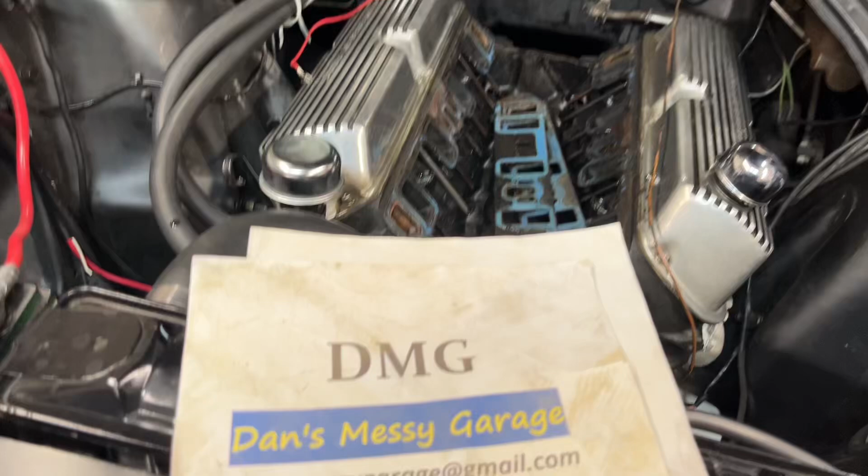This is day 2 of working on the 63 Falcon Sprint project.

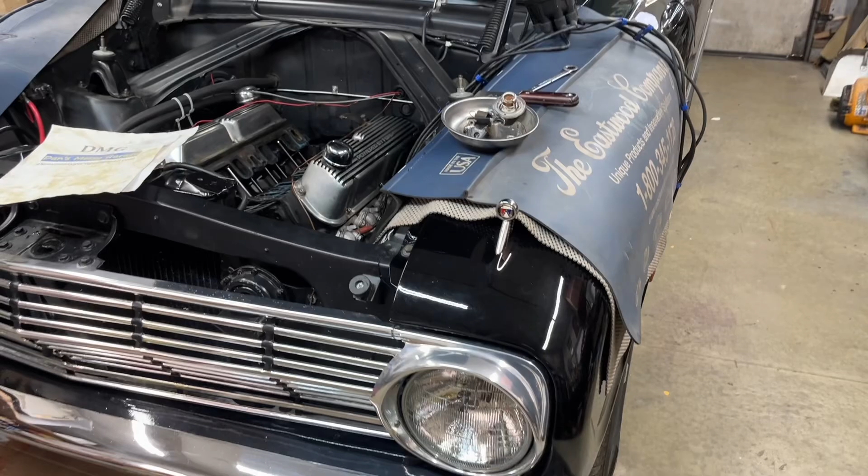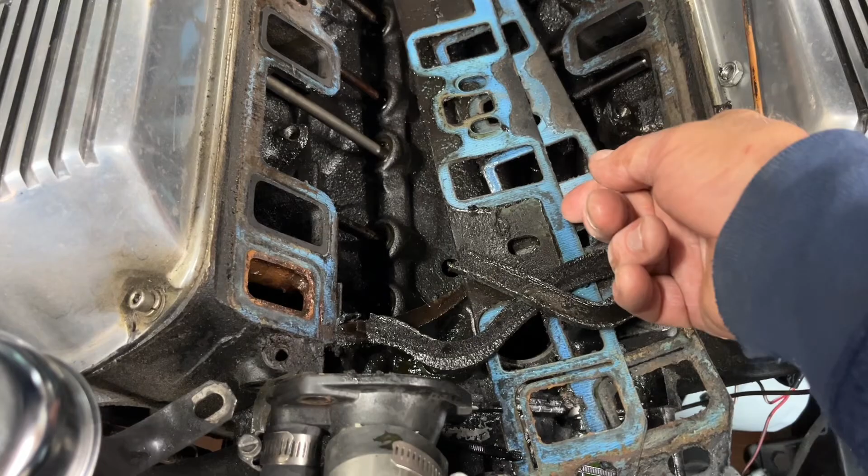To my surprise, the intake gaskets peeled right off. Normally you have to scrape and scrape on those.

And even the little cork China wall gaskets popped right off. I mean, they're petrified, but they came right off, so that's a big plus.

And the engine is in good shape inside. I don't know the history of it, and the owner doesn't know the history either because he's only had the car about 1.5 years or so.

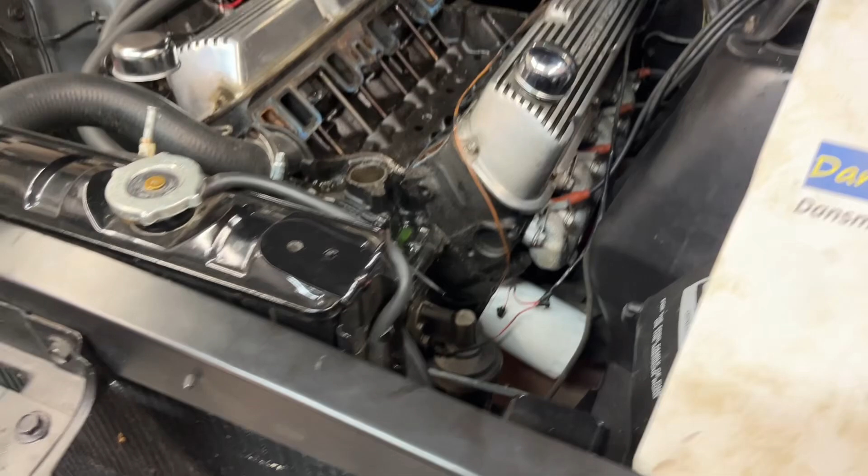And it's not full of scum. It's clean, looks good. So this should take minimal cleanup with the gasket on.

I don't use the cork gaskets on it. These are called China walls, here and that wall back there.

I use, like most people, a bead of RTV on there. Seals better, easier, lasts longer. And I gotta stop yakking and start working.

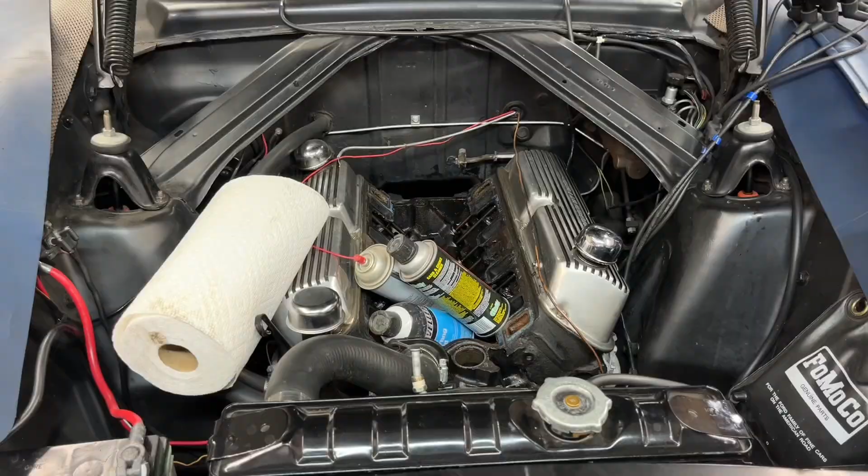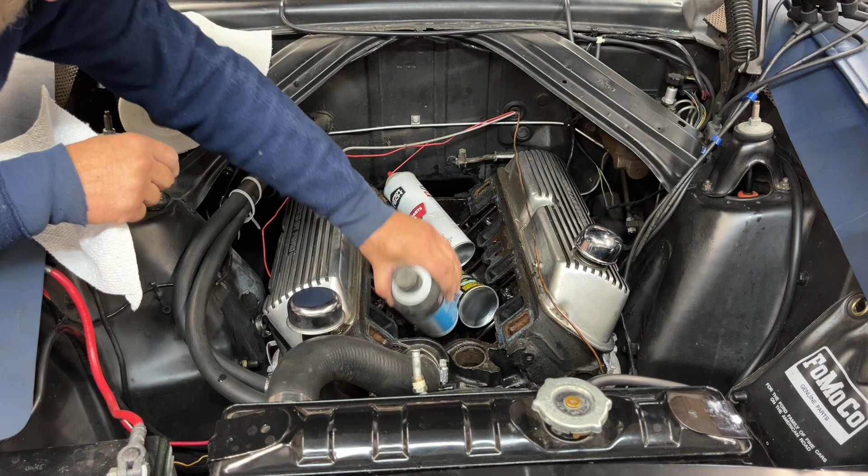I have carburetor cleaner, brake cleaner, and starting fluid. I'm going to see which one works best on the gunk that's on the gasket surface here. Maybe a combination of all of them, who knows?

Alright, here we go. That seems to be working fair, that's brake cleaner. Chunk of paper towel. I'll try carburetor cleaner next.

That might work even better. I'd say yes, that works better so far. Okay, that's carburetor cleaner.

And starting fluid. It's my favorite go-to cleaner because it doesn't take paint off or attack plastics. It just does a wonderful job of cleaning grease and oil.

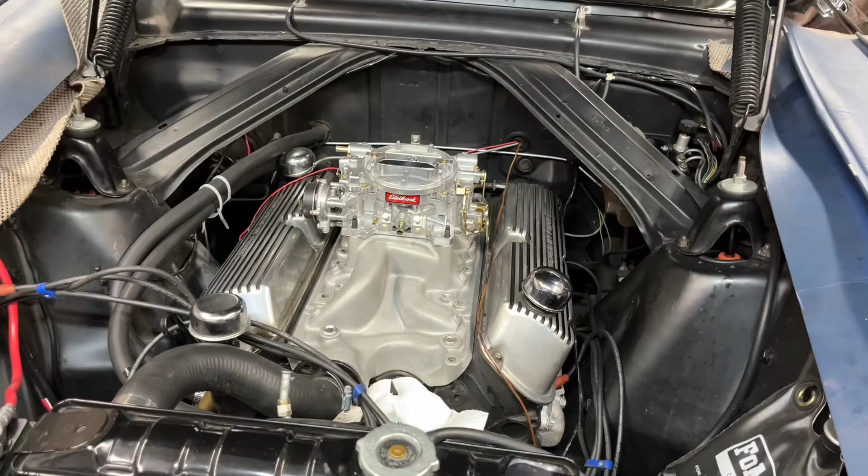I just dropped the intake on there with no gaskets, no bolts, just for testing purposes. The carburetor is just slid on, not bolted, no gaskets.

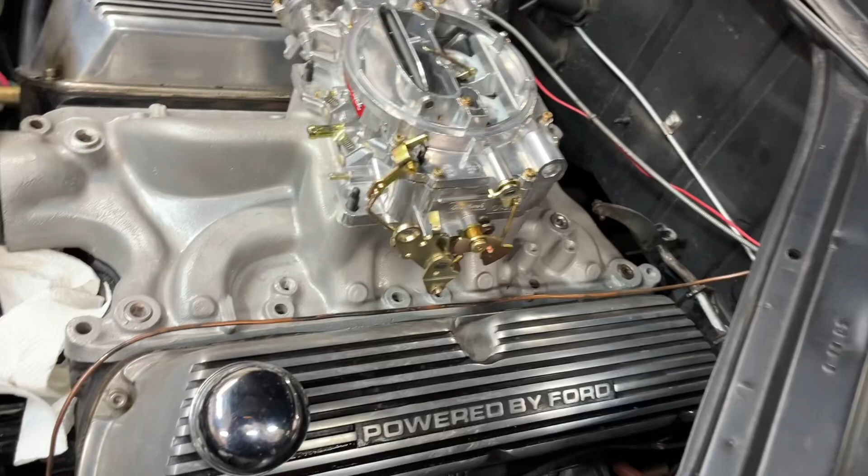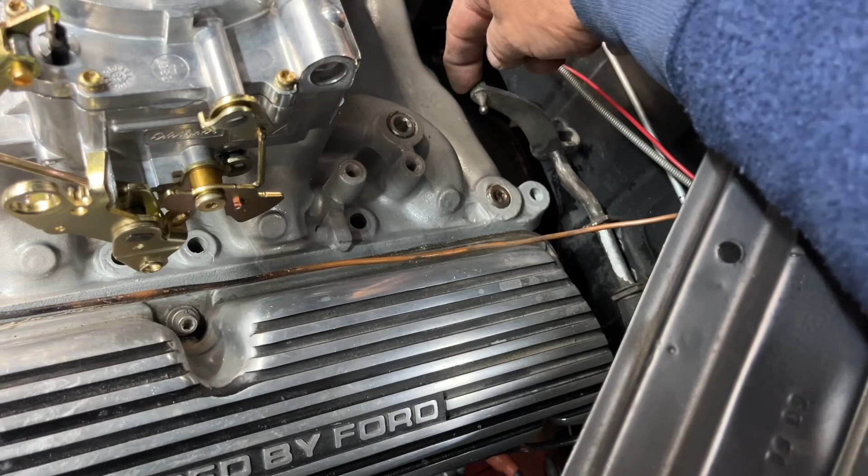No gaskets are harmed in the making of this video. Anyways, looking at the dilemma with the throttle, this little lever here is all there is hooked in the car, and that's not going to work.

This carburetor linkage, I'm going to do this one-handed here. The bottom portion, down where my thumb is, that moves approximately 1.5 inches, maybe 1 5/8 inches in that direction.

This lever, that would be idle, that would be full throttle. So this lever is pulling back for throttle.

Now I'm going to have to take that off there, cut that, and weld it so it's sticking up on a better angle.

I need to rethink this though, because if I'm going to cut that off, I'm probably going to make a different lever coming up over here.

So I could just run a rod from one of these holes back to that lever, so it's more in line and works better.

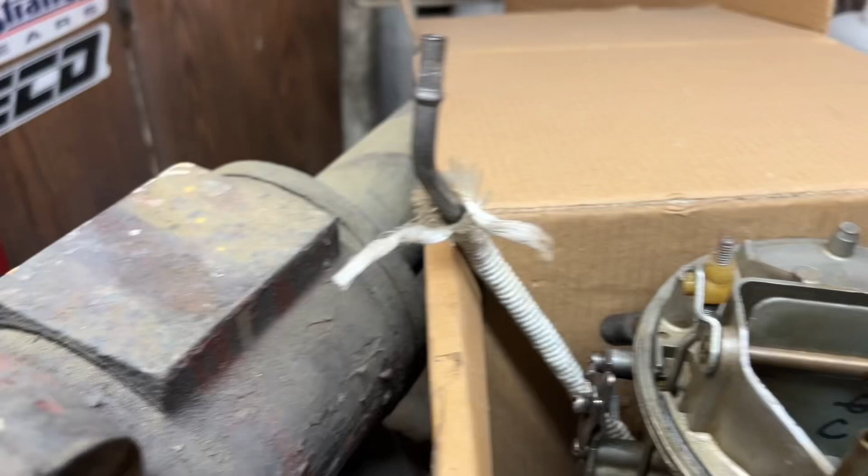Because I took this big contraption thing out of there, let me move the old carburetor.

They had this bell crank affair sitting on there, and it didn't work right.

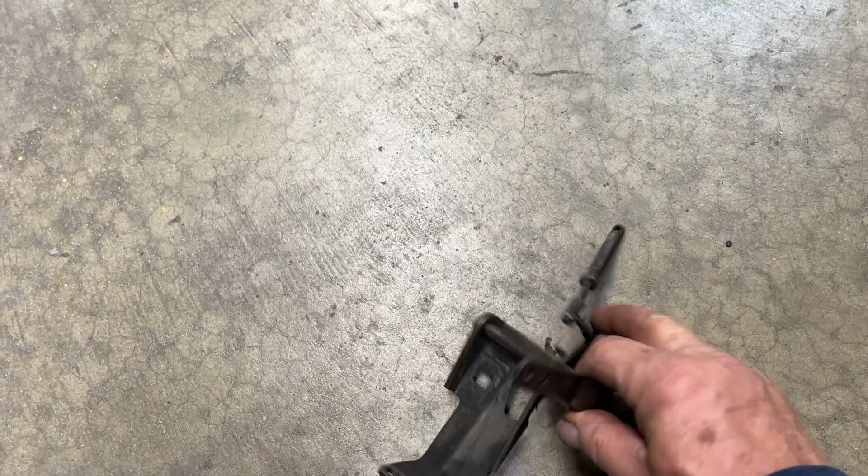I mean, it was sloppy. You pushed the pedal a lot, and this would move before it would do anything with the carburetor. And it just had a crappy feel.

Plus, the bolt where it bolts to the intake, those two holes are on an angle, and on the intake in the car, it's like that.

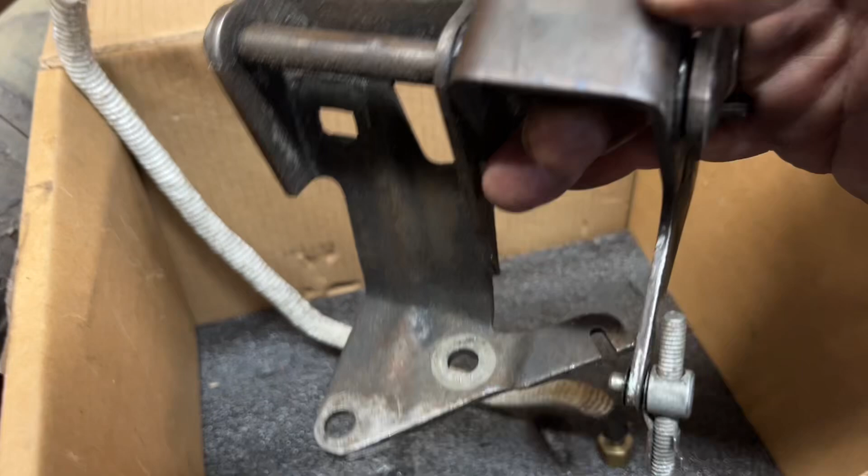But I want to do away with this whole mechanism. That might be worth something to somebody, but it's really not worth much for this project.

I have a bunch of scrap metal, and I've done stuff like this before, so I can come up with a viable solution. I have to ponder this for a few minutes, and then I'll bring you back and let you know what I decided.

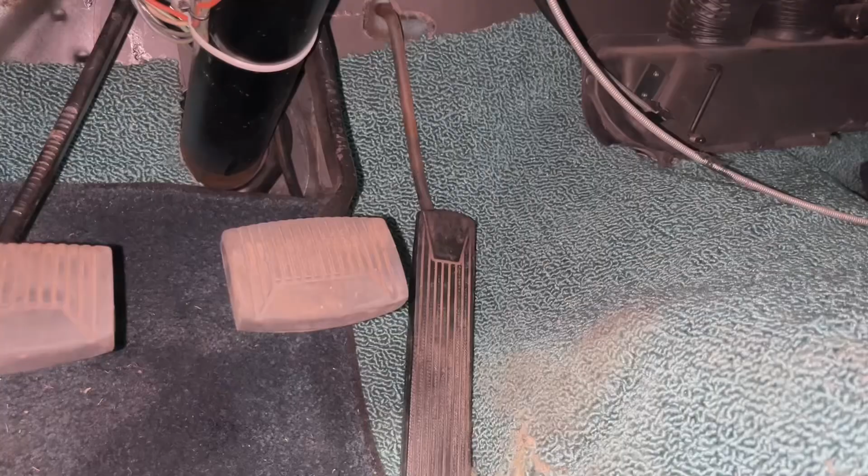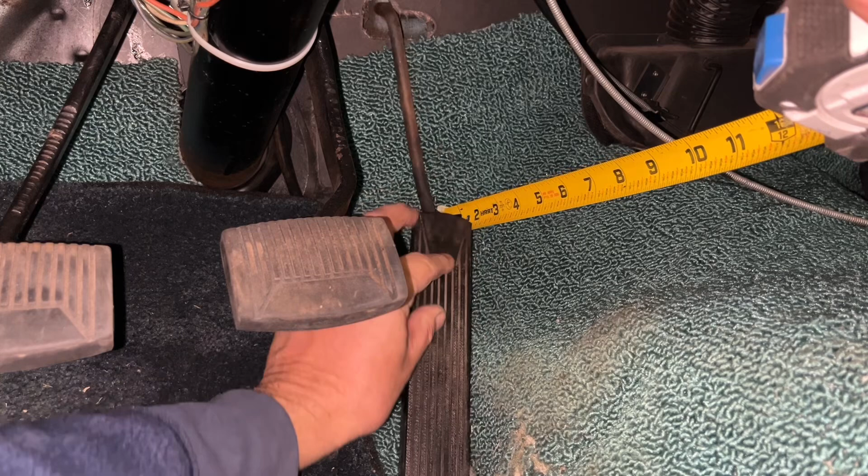Trying to get the camera positioned where I can show you this. In the Falcon, the gas pedal from the factory feels like it has about 3 to 3.5 inches from idle to full throttle.

The pedal pivots on the floor under here somewhere, comes up through the carpet.

It's bolted to the floor under the carpet, and the top of it pushes on an arm, and that arm...

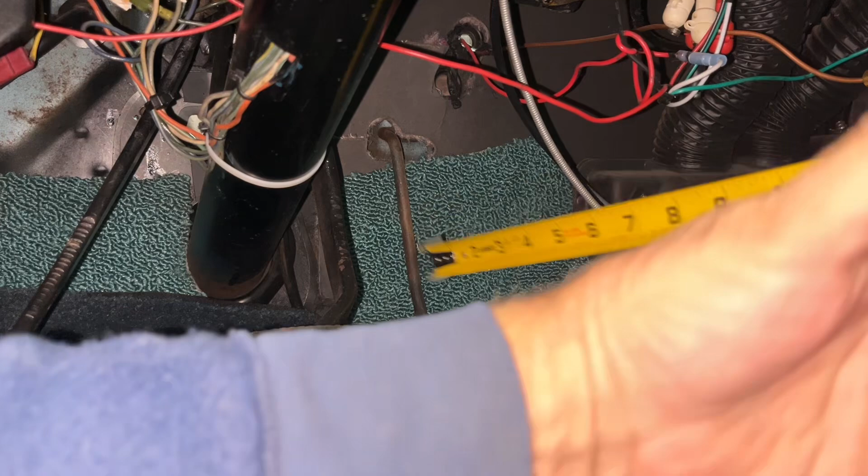is about 8 inches long where it pivots in the firewall. So we've got like 3 or 3.5 inches of travel here on an 8-inch long rod sticking through the firewall.

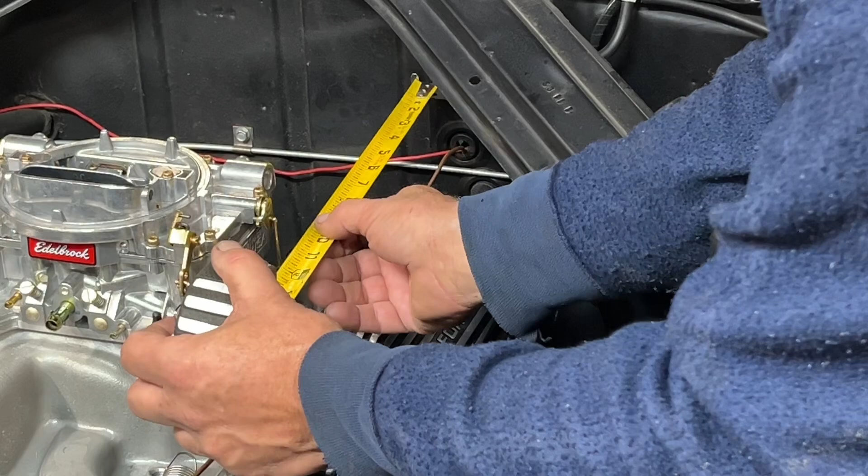Okay, now I'm under the hood. The carb's at idle, choke is off. If I measure from the firewall to this location where this little arm would hook to the carburetor, I get roughly...

13 inches. Now there's another location higher, this big hole. I could use the center of that if I had to get more throw. That is, let's say, 13.5.

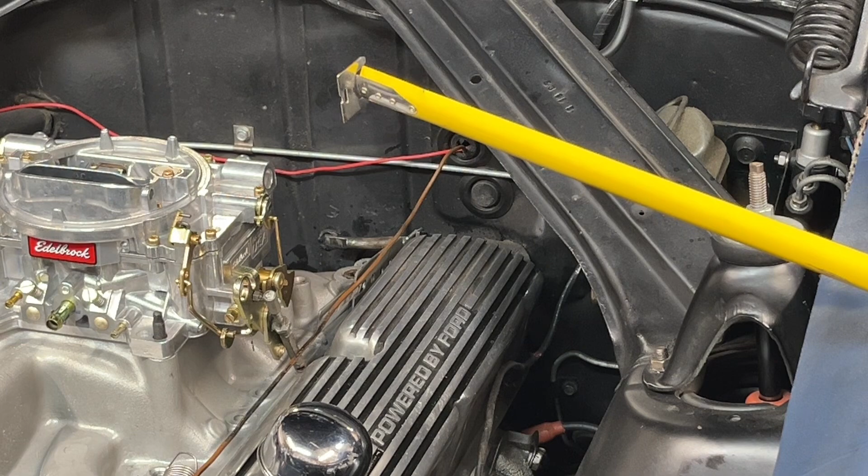I'm gonna write that down. So we got 13 and 13.5.

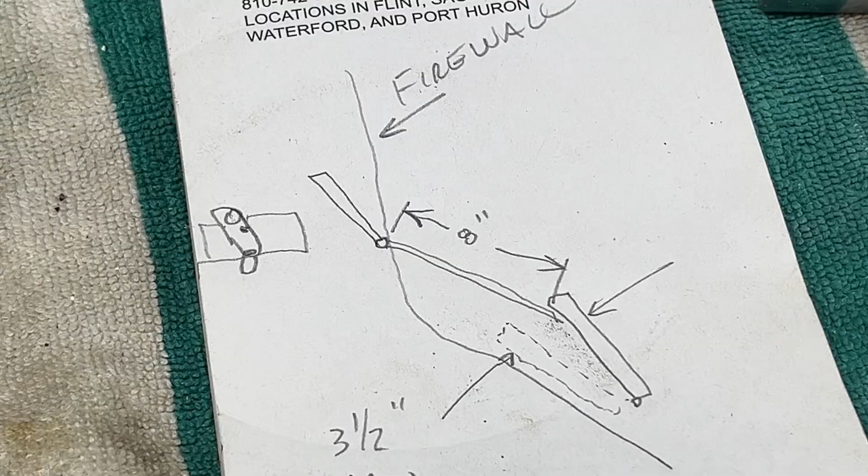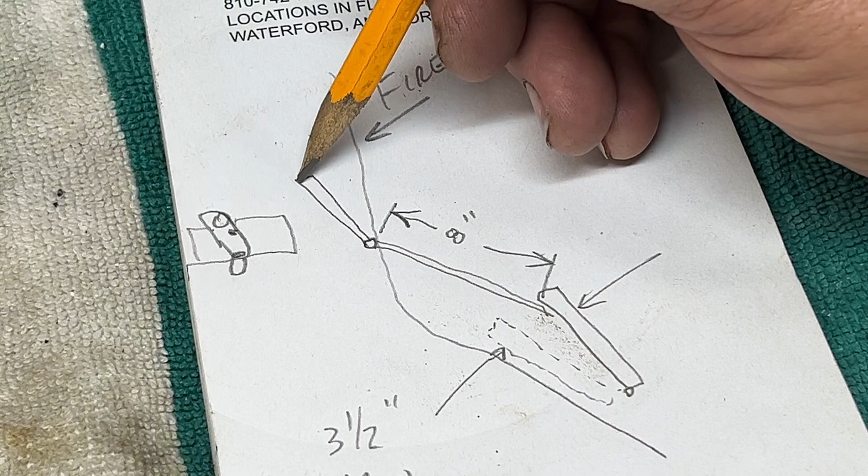Now when you take an 8-inch long lever, let me see if I can illustrate this on paper. All right, this is the firewall, this is the gas pedal, and it has about 3.5 inches of travel in that direction. The lever that it pushes on is 8 inches long, and if that moves 3.5 inches, and if this were 8 inches out here, then to get this to 3.5 inches here, this would move 3.5 inches out here.

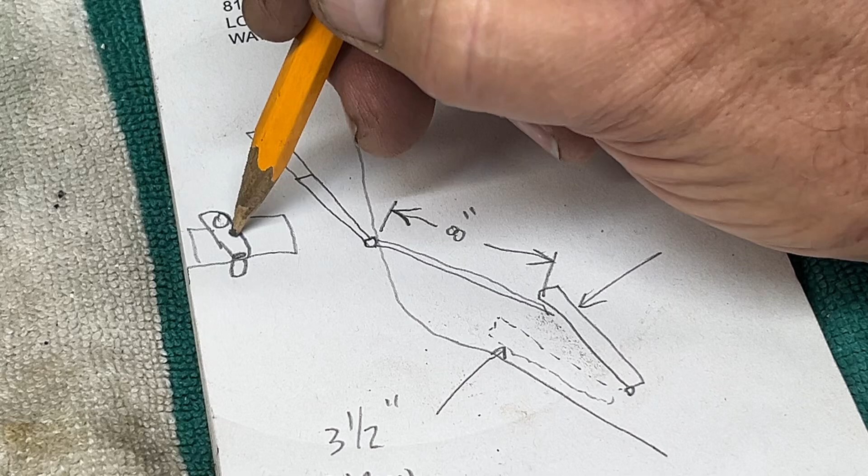But the carburetor is here, and the positions to put the lever or the rod that's going to go from the carburetor to this link arm are here and up here, and that's only got 1 3/4 inches. I don't think that distance here is viable in the car.

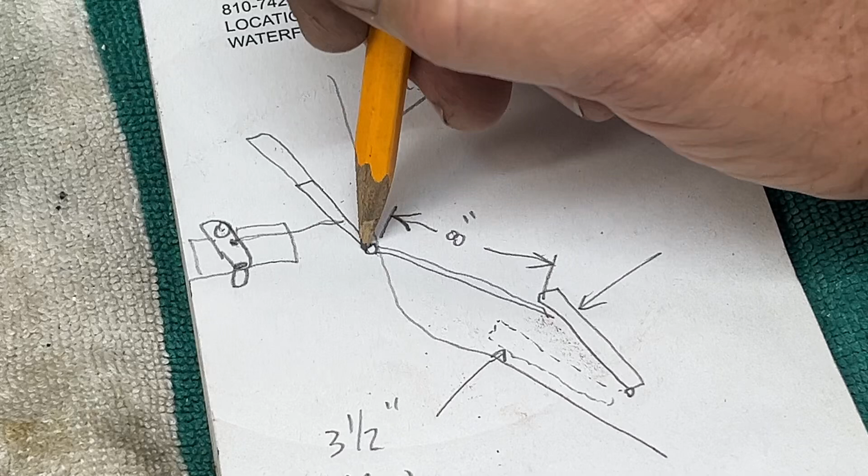No, it looks like that's got to be 4 or 5 inches. What I'm getting to, yes, this will work, but the gas pedal is going to have very little movement for your foot.

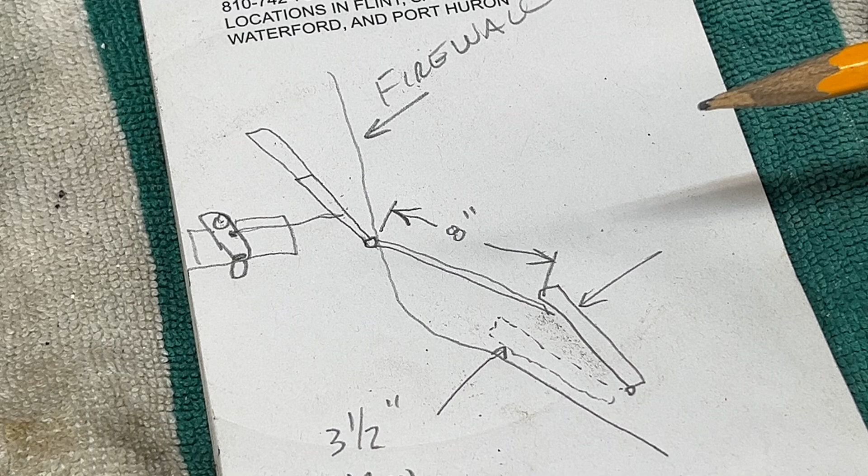Right now I happen to have at my disposal to measure, I have 5 cars around here, well 4 cars and a van. I'm going to go out and measure how much throttle pedal travel they have, because all those drive fine.

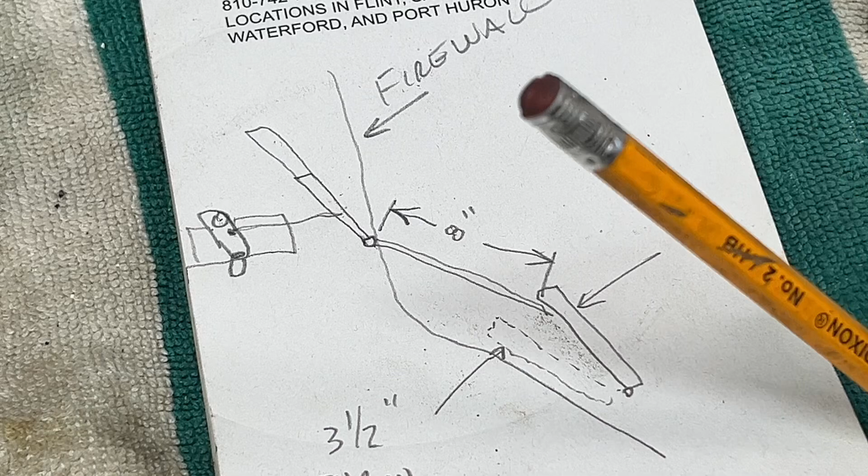See, if you have this only so it's moving, like 2 inches, that's from idle to full throttle. Just picture your foot, that's not going to be fun to drive, especially with a clutch. So I'm going to go measure some cars.

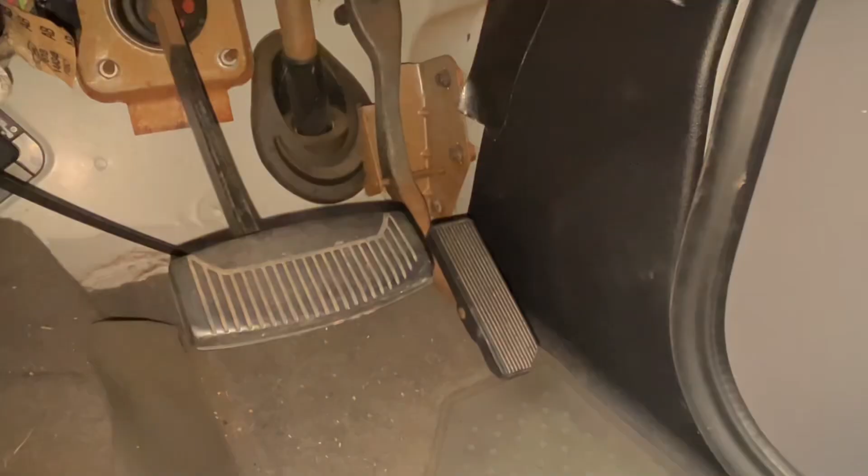Of course it's raining, but in a van, it's an E350 van, I'm going to try to measure this. Oh, it's going to be tough. 1.5 inches.

Three and a half, so that's only 2 inches, eh? Yeah, that's really hard to measure. How about down here? That's going to exaggerate it though. 2.5 to 3 inches, less than I thought.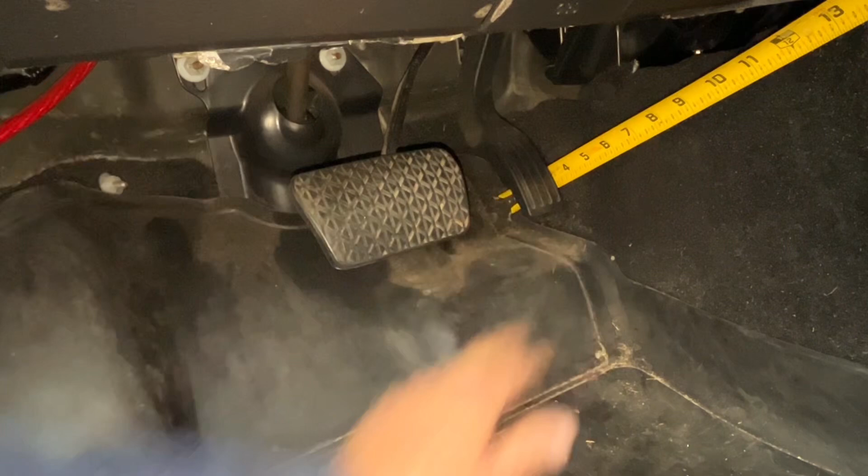Let's go to the next car. This is my Fusion, everyday driver. Looks like we're starting out about 3.5 from the floor, goes down to 1, so that's 2.5. I may be worrying about nothing.

Go to the next car. All right, my brother's Monarch. Looks like it's starting out around 5, about 3 inches travel, okay.

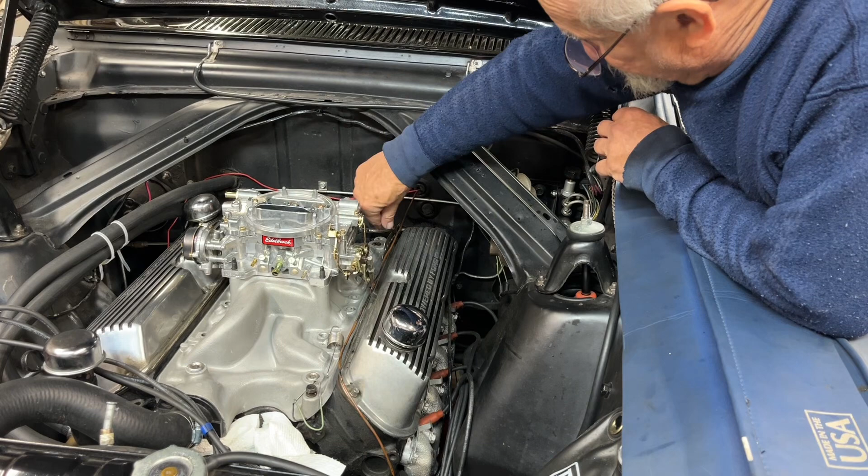All right, I've been playing with this linkage in here, coming up with different arms and all this for probably an hour and a half now. So what I'm going to do is just mock this up. I'm going to have to come up with a way to anchor this rod or this lever to the rod temporarily so I can mock up a linkage from the carburetor to this lever, and then just get in the car and see how it feels with your foot.

2.5, 3 inches is what the other cars are measuring. I didn't bother measuring the last 2 cars, it's raining, I was already getting wet. Yeah, I'm a baby. So I'm gonna mock it up, see how it feels, and if it's good, then I'm gonna come up with a permanent solution. Okay, I made a proof of concept model type thing here.

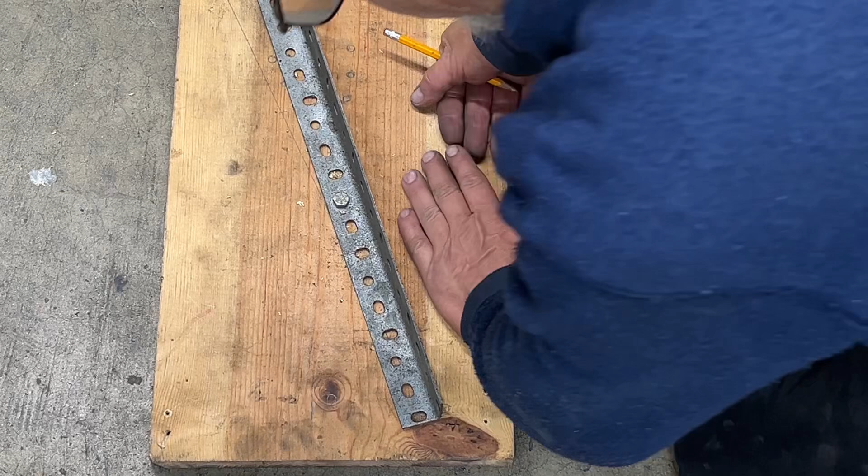This represents the pivot in the firewall. Right here is the gas pedal at 3.5 inches from the firewall, and the gas pedal would be indicated like right here. So when it swings over to this position, I drew a line up here and started out with a line here. Since the pivot's here, I measured out in increments along these holes here - that hole, that hole, that hole - marking it from idle to wide open throttle.

And I made these holes here, there, and there. Then measuring the arc between these holes, this one here is about 1 3/4, 1 7/8, somewhere in that area. So that would be the distance I need - from here to there. So that arm needs to be that long. Now I'll make the arm a little longer so I could drill holes into it if I have to. It's not going to be made out of this - this is mock-up purposes only, just so I could get a better understanding of how long that arm needs to be.

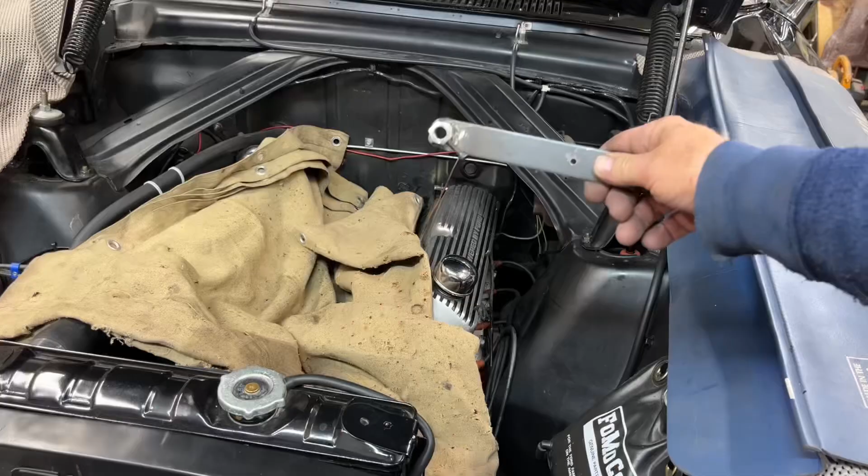Okay, this is what I came up with. Got a piece of steel, welded a nut to it, and then drilled and tapped for a set screw. This will slide over that stub shaft down there and give me some adjustability before I tighten it. I was fixing to weld this thing on there, then I thought, if I don't have this in the right position when I weld it, I'm in for a lot more work. So it'd be better if this was removable in the future too. So once I get everything squared away and tighten this screw down, that's going to mark that shaft. Then I can drill partially, not all the way through, maybe 1/4 of the way down, drill a hole, and that set screw goes down into that hole and really locks this thing onto the shaft so there's no slop.

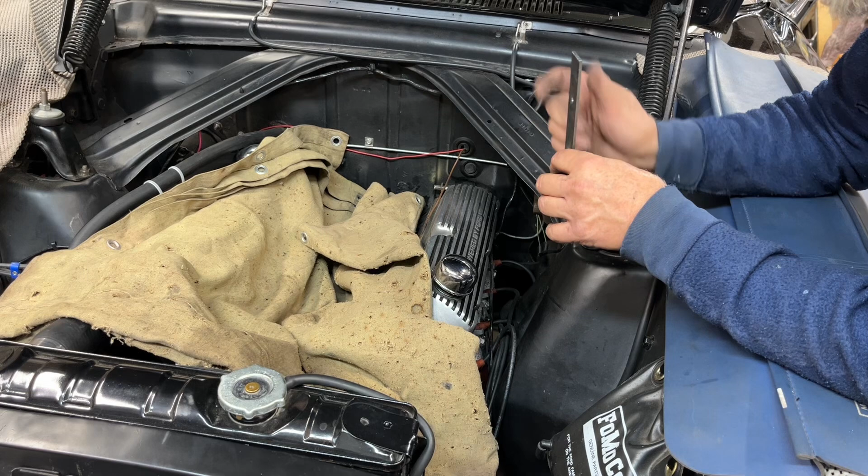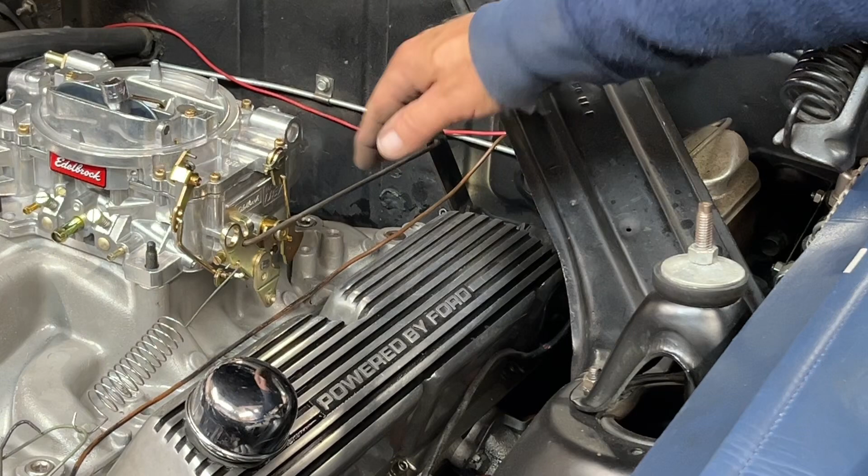So now I need to mock it all up, put a return spring on it, get in the car, step on the pedal and see where I'm at. I'm going to do a mock-up test. I just bent a piece of rod to represent what's going to be there - that's not permanent, that spring's not permanent. And I put a socket in the choke here to keep that open so I can get full throttle movement, because if the choke is partially closed, you can't get into the 4-barrel secondary linkage. That's got to be open before it'll go wide open.

Let's see how it feels inside the car. You know what? That feels good. There's partial throttle, just a little bit. There's wide open. Success - I think the whole location's good, right where it's at. It's in a good spot.

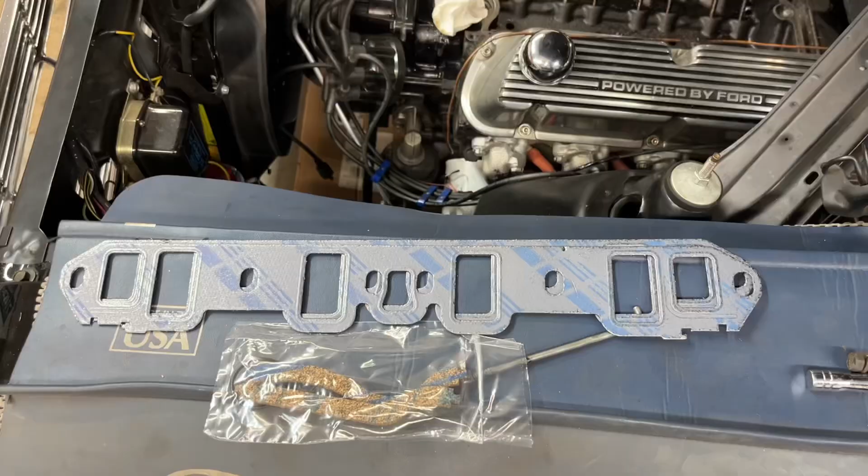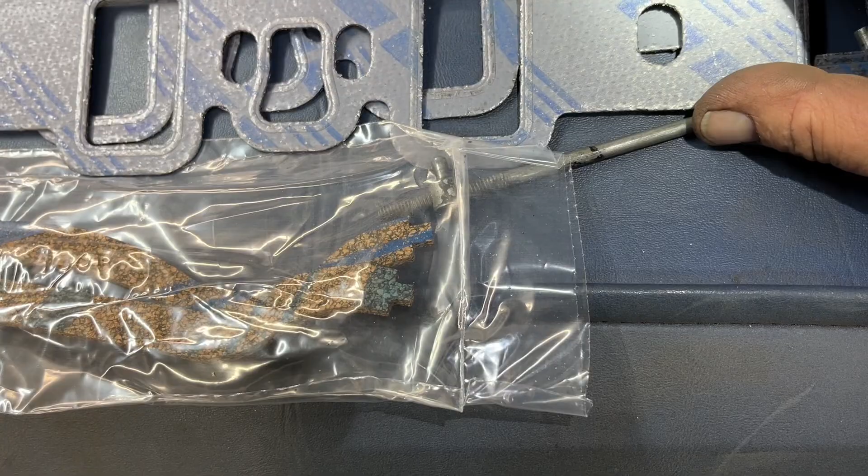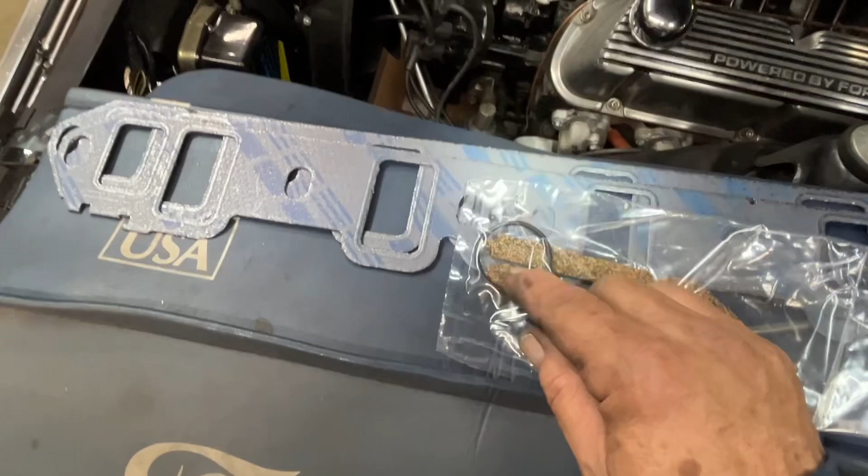I'm about to put the intake on. It's the intake gaskets - they're Felpro. These aren't marked that says, you know, against head or anything like that. Let's see what number are these - 901031. They come with cork gaskets, and those are going directly into my circle file right there. And they have a new distributor O-ring - I will put that on the distributor, but those things right there, straight to the trash.

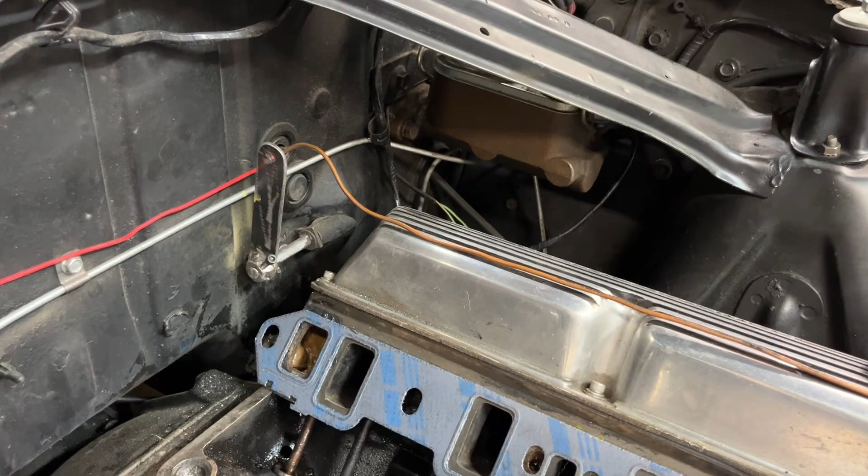There's the arm in position. That set screw is tight - set screw right there. I cut the arm off, rounded it, sanded all the edges smooth. I'll sandblast that and paint it black. It'll look fine.

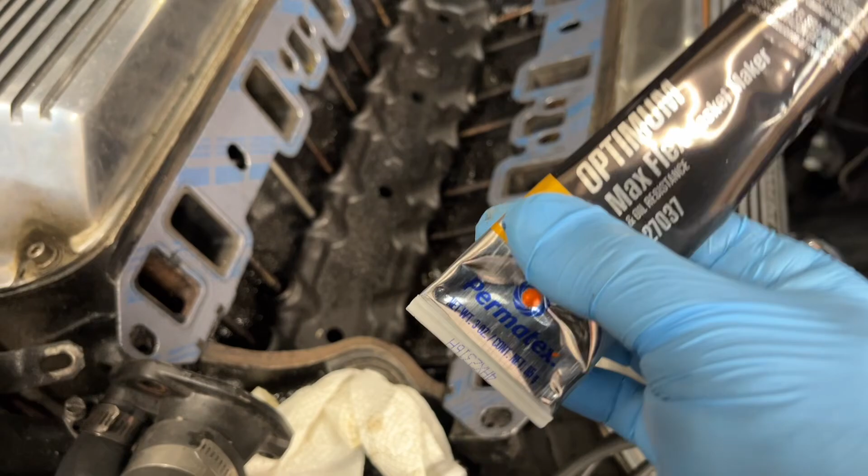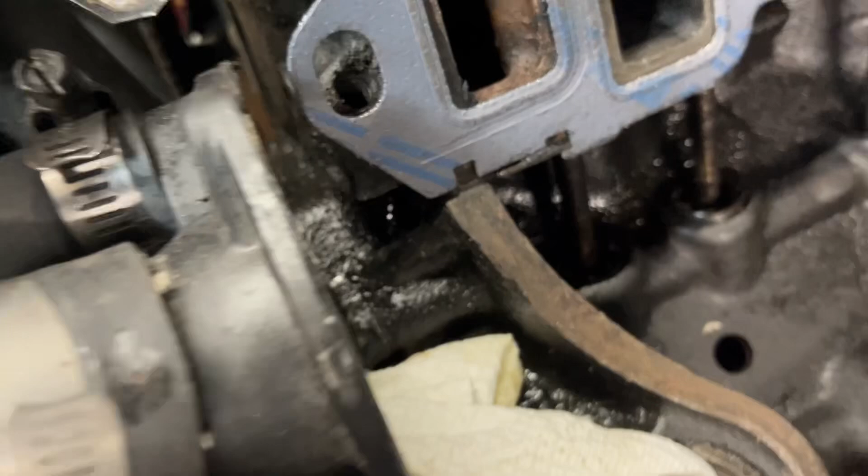And I took some... whatchamacallit... I'm using Permatex Optimum Max Flex RTV blue silicone. I took some on the back side of the gasket where it meets - these are water ports at the end - just there on those four corners, that's the only place I put it. And I'll put some on this side of it too, because I don't want a water leak, antifreeze leaking out of there. You don't need anything on the other ports. And these gaskets work just like the ones I put on the 302 in my 302 build series - there's a little tab or finger that locks under the head gasket, so that keeps it from sliding around or moving.

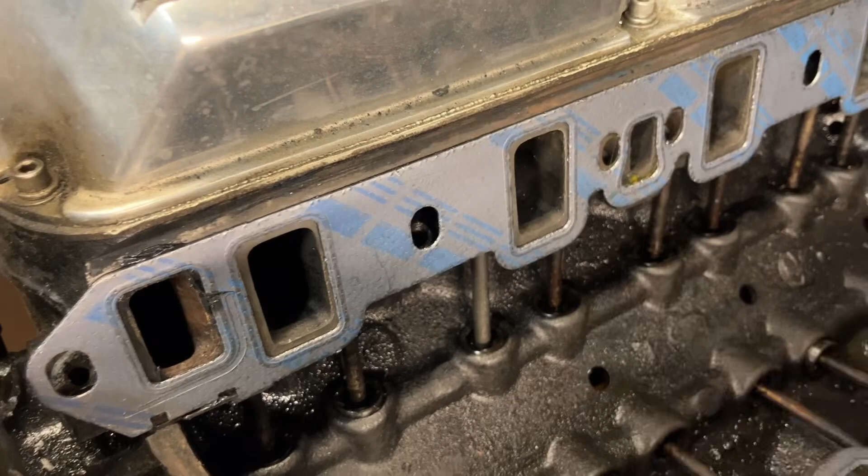I'm going to put a generous bead of RTV across the back here. I'll do the same on the bottom of the intake, do a bead, and then let it set up for a few minutes.

Drop the intake on, and then just proceed to bolt her in. I'll follow the torque sequence and torque spec, but I'm not going to record all that.

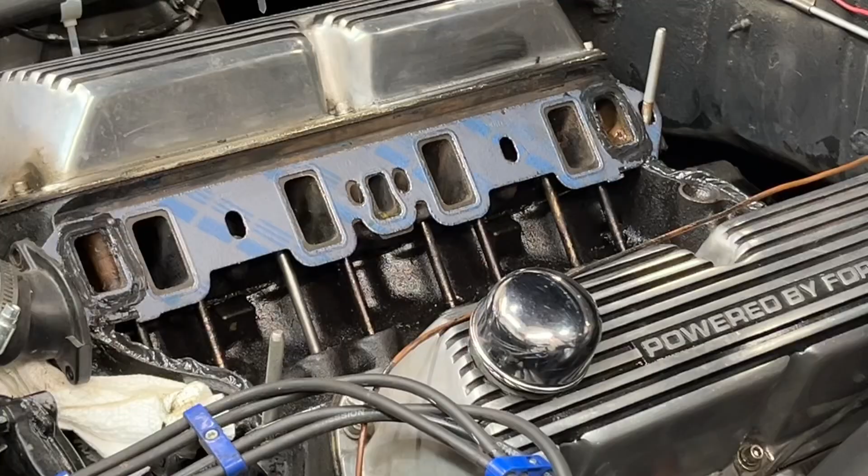Alright, what I did, I put in a stud, let's call it, in each corner, opposite corners. That's going to be like a guide pin for me to drop the intake straight down on there. I got a bead of silicone across both China walls.

Technical difficulties. And on the bottom of the intake, I put a bead, and it's been hardening up for a few minutes. What I'll do is drop this down.

If I can grab this without smearing things, drop this down on those pins, and then it's going to go straight onto the block. Get hung up here. There we go. Straight down. A little wiggle jiggle.

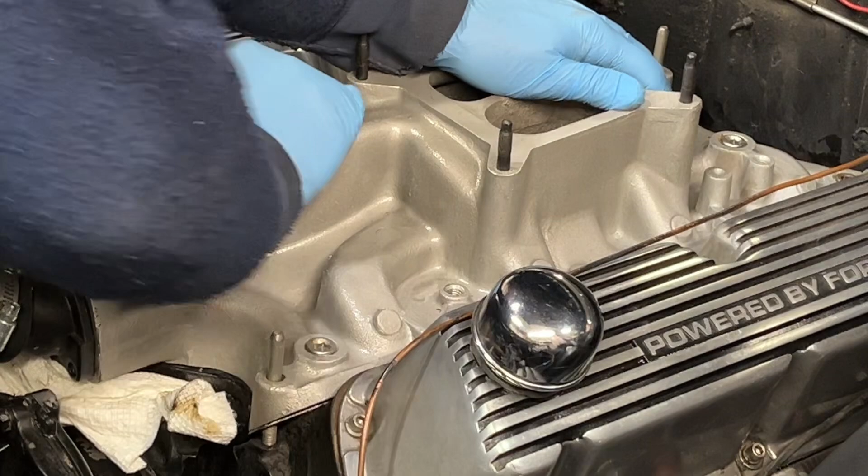Alright, now those two beads of silicone on the ends of the intake are sticky. They're going to glue it together and prevent oil leaks. Now I can take my little guide pins out of here and start to install all the bolts.

New development here. These outside bolts on each end just go into, let's call it, air. They're outside the engine. The other ones, 2, 4, 6, 8, go into the intake area of the engine where there's oil.

And what you should do, or could do, or I do, is take some thread sealant and put it around the top portion of the bolt where it's going through the intake, to block any oil that could possibly come up through there. Here's what I discovered.

These bolts are from the intake I took off. They're not really long enough for this. These thread bosses are higher than the old intake, so these bolts need to be a good quarter inch longer. You drop them in there and there's hardly any thread engagement to tighten it.

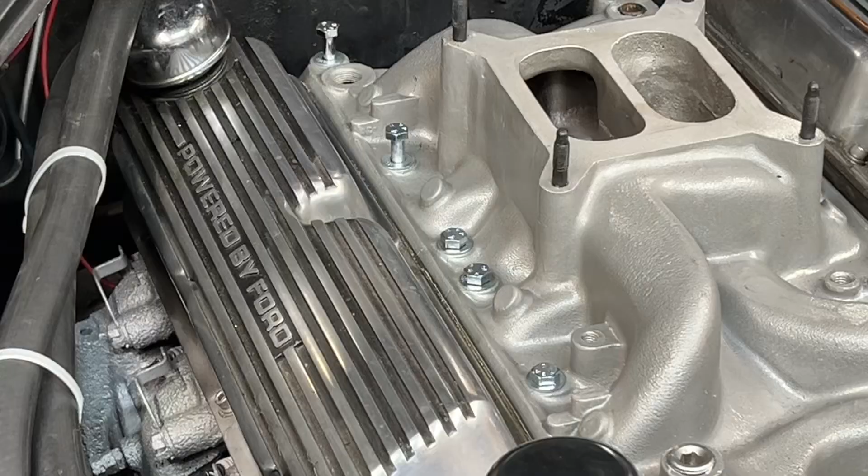Another development. I went up to Ace Hardware and got the bolts. Now, I wish I'd have known I needed bolts before I went to O'Reilly and got the RTV, because they're in the same complex. I could have had two stops in one trip. Anyways, new development is I got bolts.

They only had 2.5 inch or 2 inch. I needed like 2 1/4. They had 2 1/4 inch bolts, but they were in chrome, and it was $5 for one 2 1/4 inch chrome bolt. Twelve of them would have been $60 plus whatever the washers cost. It's outrageous. So I bought the 2.5s and did a test fit.

They go in, but not all the way. I don't know if you can see this, but the bolt is in until it's stopped. I wasn't reefing on it, just threaded it in there. It stops, and the washers are loose—you can spin them. So each bolt is going to have to be cut down about a quarter inch.

I've had it. I'm done for today. It's already 6 o'clock. I started in here around 9 o'clock. Now, I wasn't working the entire time—7 hours, is that right? I can't even think. 9 to 3, 6, 9 hours? Yeah, well, 9 hours. I probably have maybe 4.5 hours, I'll have to figure it out, of actually working.